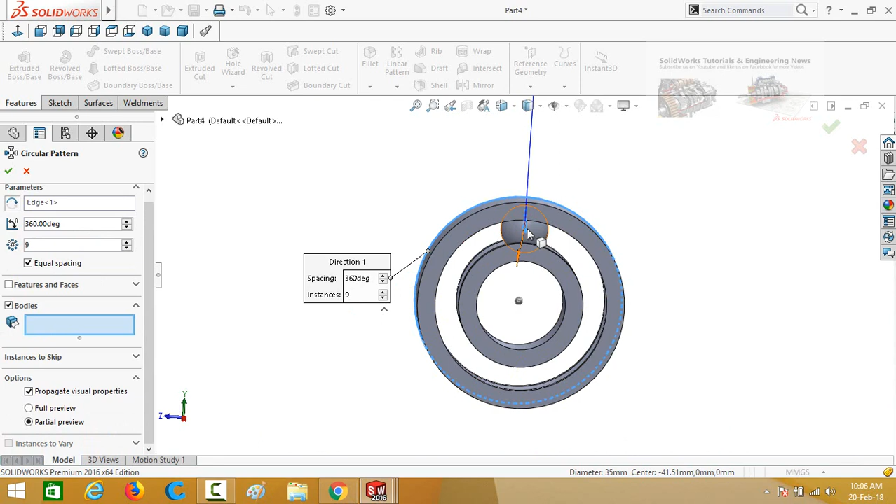Only merging feature may be patterned. So for that, scroll down and then click on this box bodies, then select this ball and press OK button. So bearing is ready. Change the appearance of bearing.

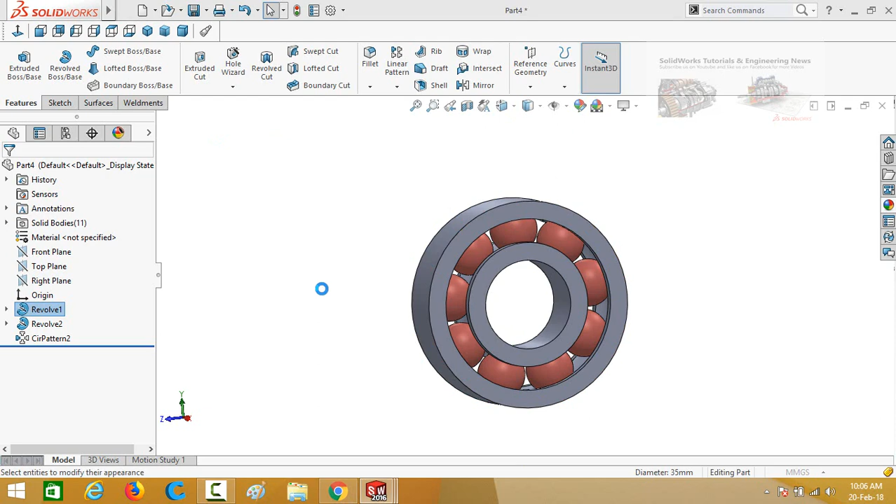Press OK button. Now click on this outer face and then select revolve. Change its color to. Press OK button. Now save this bearing.

The bearing number is 6202. Save it.

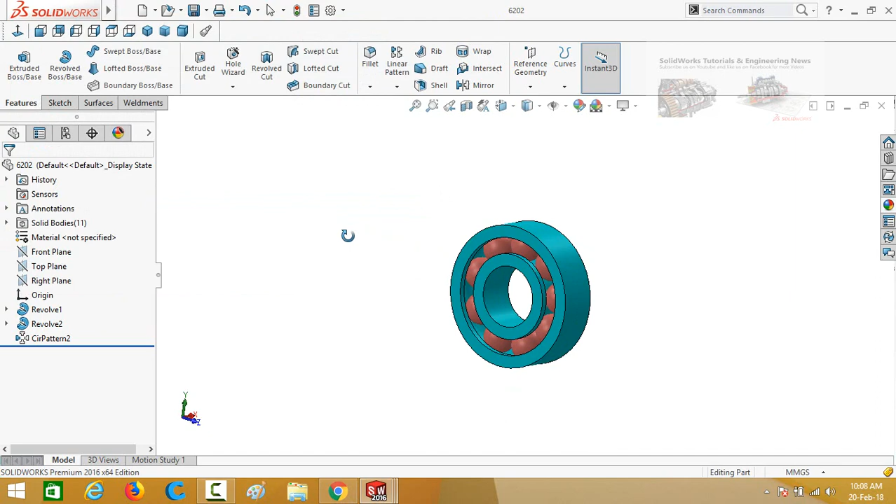Now we have to design the outer casing of this motor. So for that, again start from new part and then sketch on front plane and draw a center line from origin. Now draw another line, start it from here.

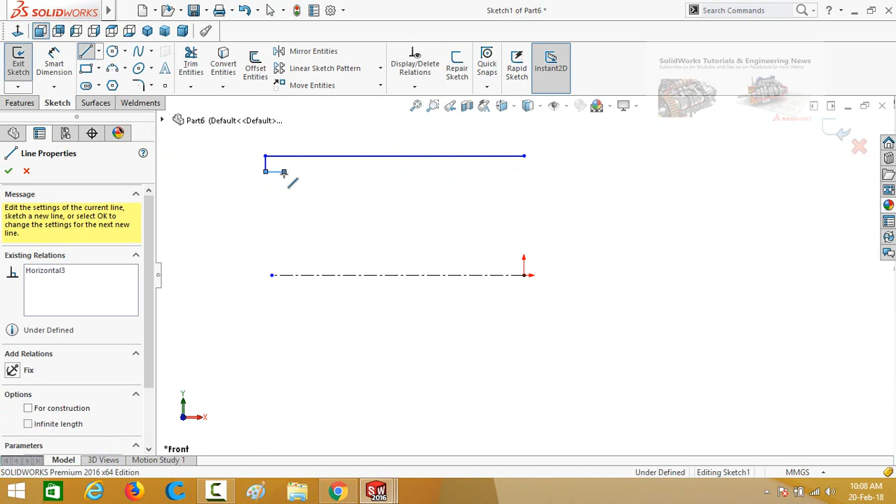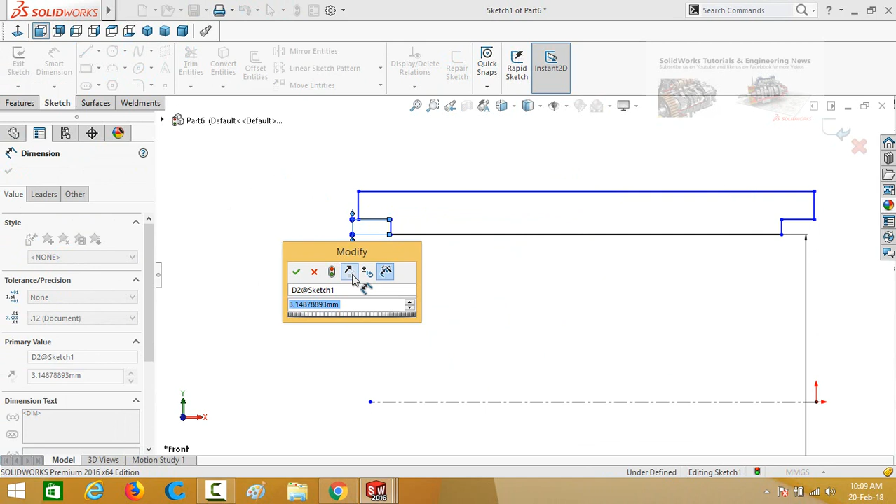Press escape button and then select both of these lines, make their relation equal. Now define the dimensions. This diameter is 70 millimeter. This height is 3 millimeter and this height is 5 millimeter.

This length is also 5 millimeter and this length is 60 millimeter. Press escape button, select this origin and this point, make the relation vertical.

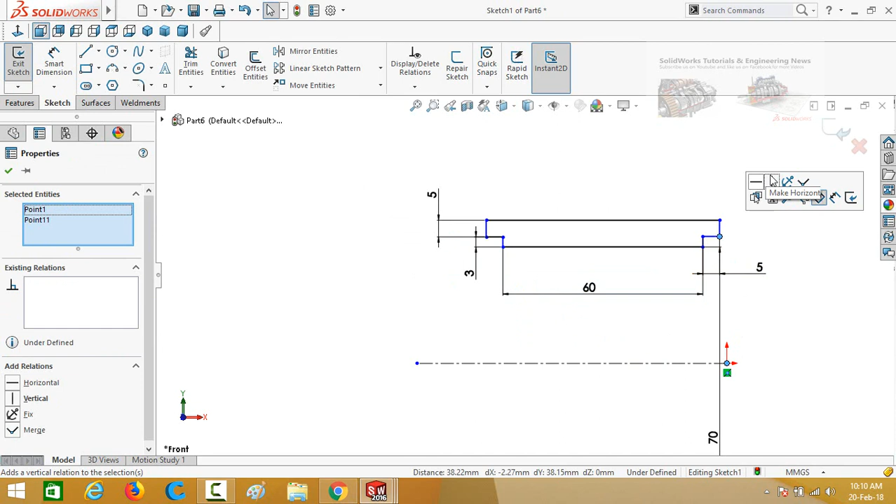Select both of these lines and make their relation collinear. Now our sketch is fully defined, so we can apply a revolved boss base feature on it. Press OK button.

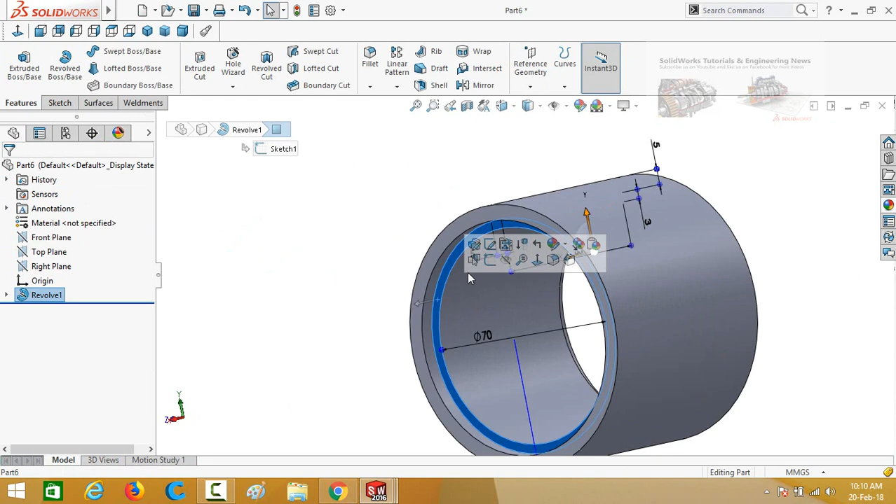Click on this face and then sketch on it. Make normal to by pressing Ctrl+8 key from your keyboard. Draw a line and start it from this quadrant. Now draw a 3-point arc.

Press escape button. Select this point and then this point. Make their relation coincident. Now select this arc and this circle, make their relation concentric.

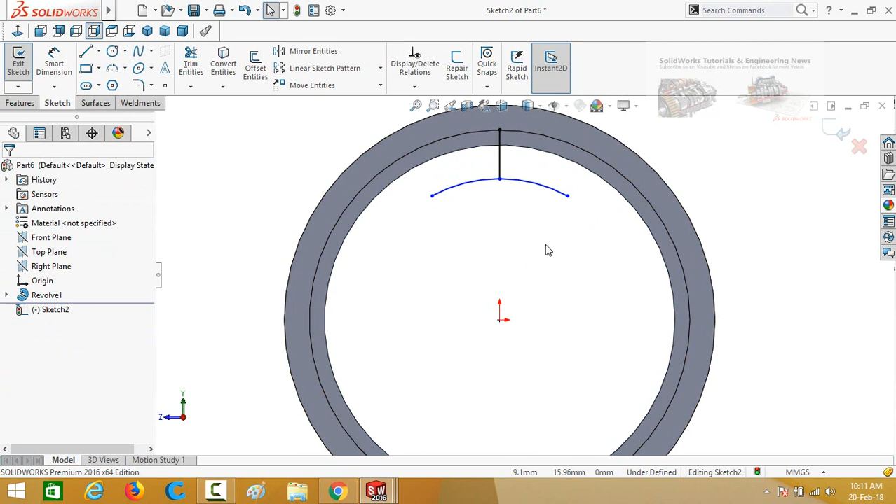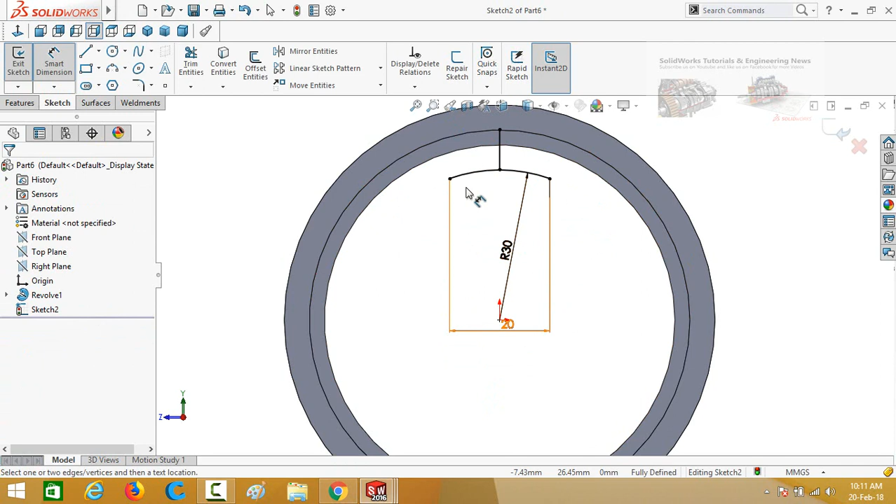Now define the radius of this arc, which is 30 millimeter. Now define this length and it is 20 millimeter. Our sketch is fully defined. So go to features tab and then apply a extruded boss base feature.

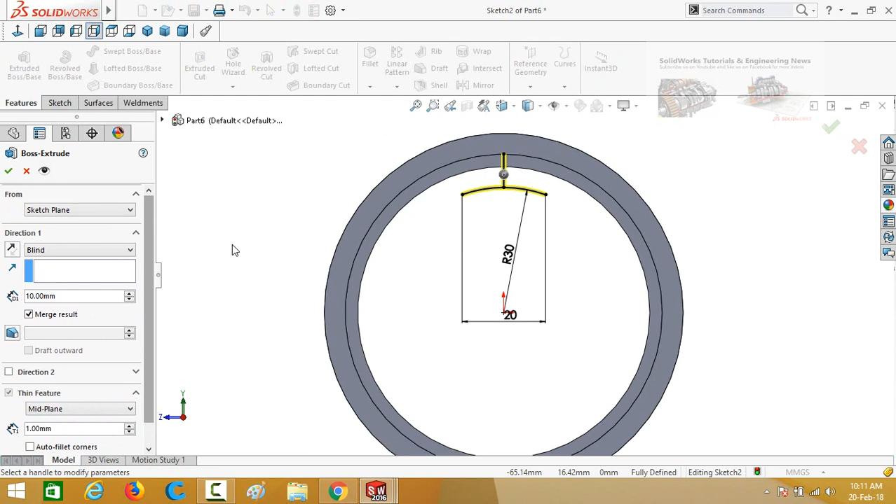From here, thin features, drop down these options and select mid plane and type the thickness, it is 1 millimeter. Now double click on this face and press OK button.

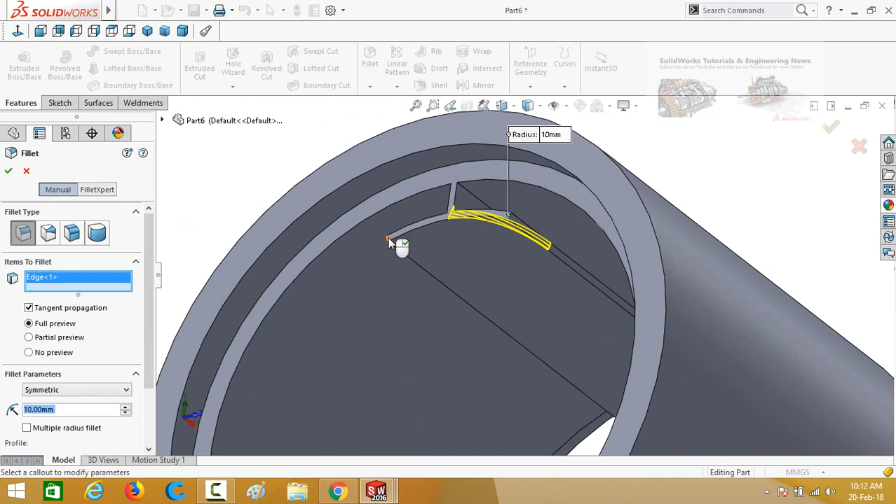From here select fillet command. Now select this corner, one by one select all these corners. Fillet radius is 10 millimeter, so press OK button.

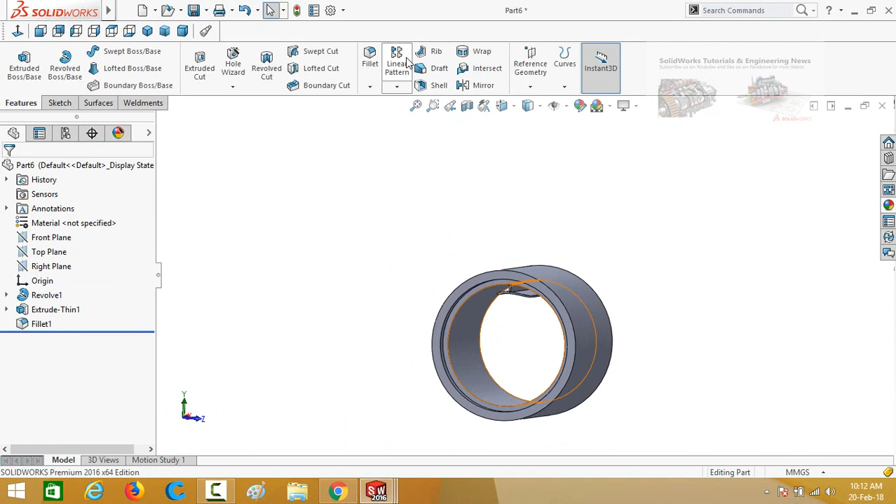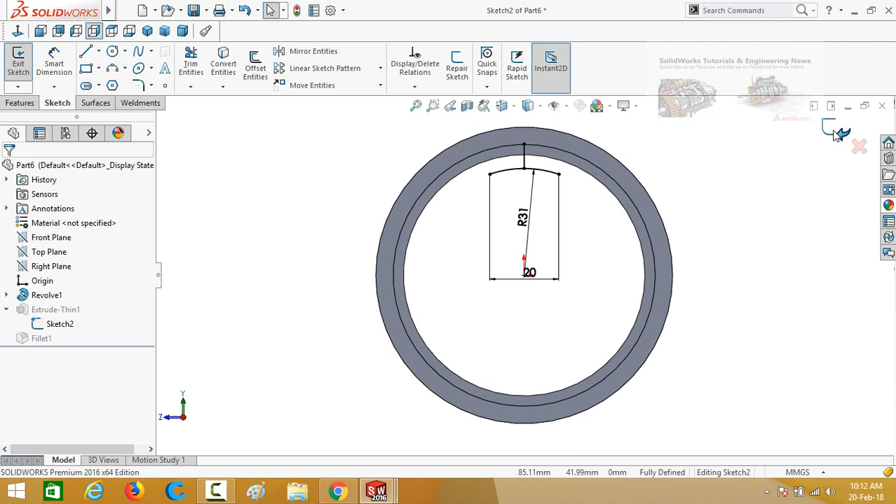Drop down this option and then select this sketch and edit it. Press Ctrl plus 8 key to normal to. Change this radius. Instead of 30, type here 31 millimeter. Now press this button to save and exit from sketch.

Click on this button below the linear pattern command and then select circular pattern. Drop down these options. Select extrude thin 1 and fillet 1. Now click on this box and select the circular edge.

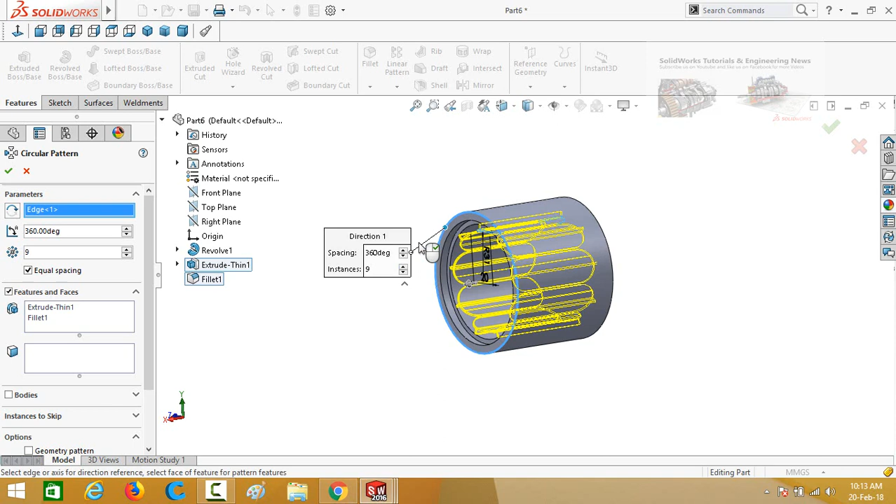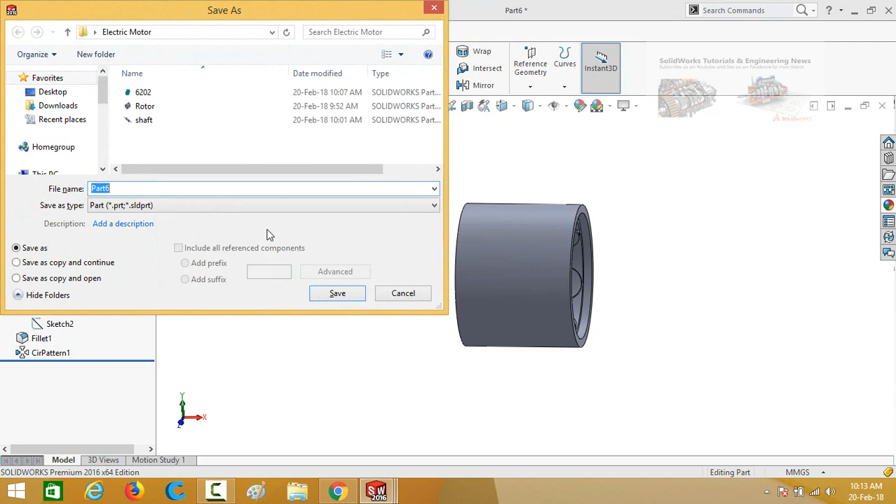So these are the number of poles for our motor, and the quantity is 9. Press OK button to save. Now save this part as outer casing.

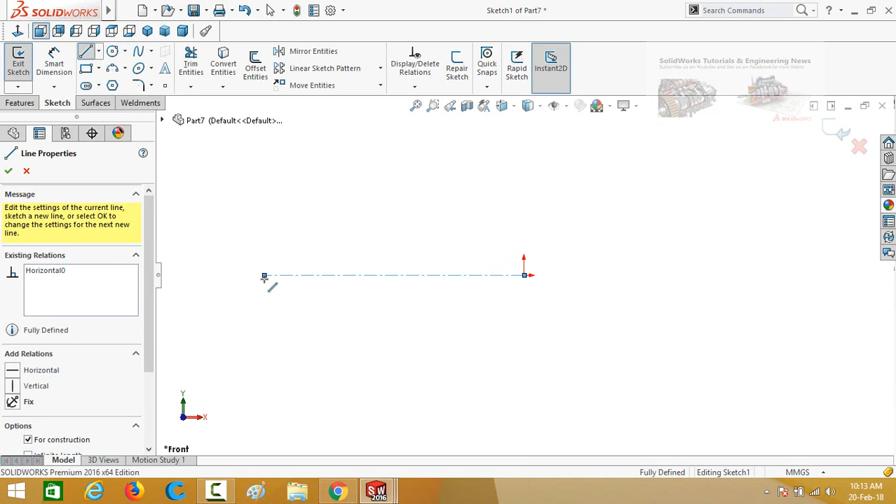Now we have to draw the side covers of motor. So for that, start from a new part and then sketch on front plane. Draw a center line started from origin. Now draw another line like this.

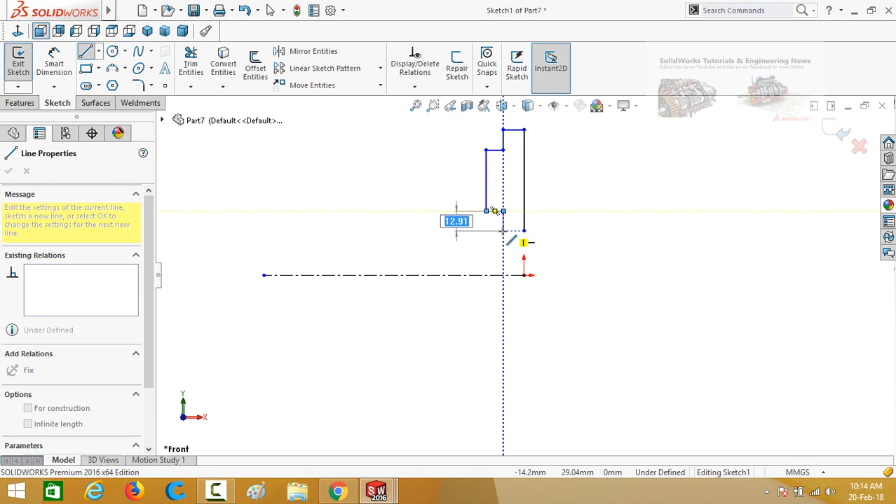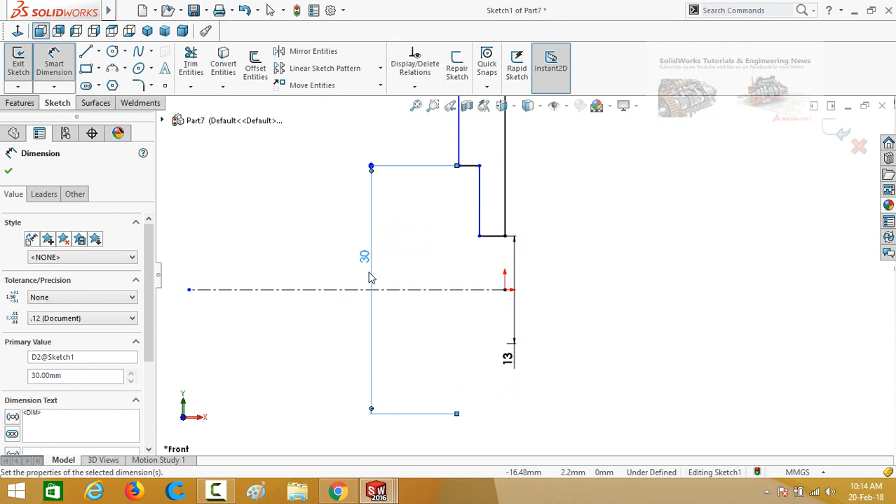Now define the diameters. This bore or diameter is 13 millimeter. This diameter is 30 millimeter. This is the bearing size. So for the diameter of this seat, we have to check the outer casing.

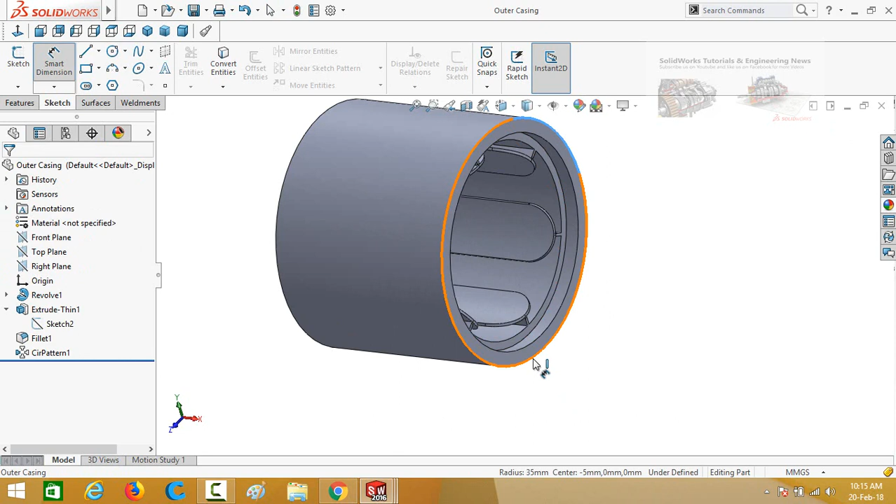Click on sketch and then select smart dimensions. Now select reference dimension and then check this diameter. So if the radius is 35, it means the diameter is 70 millimeter, and this diameter is 86 millimeter.

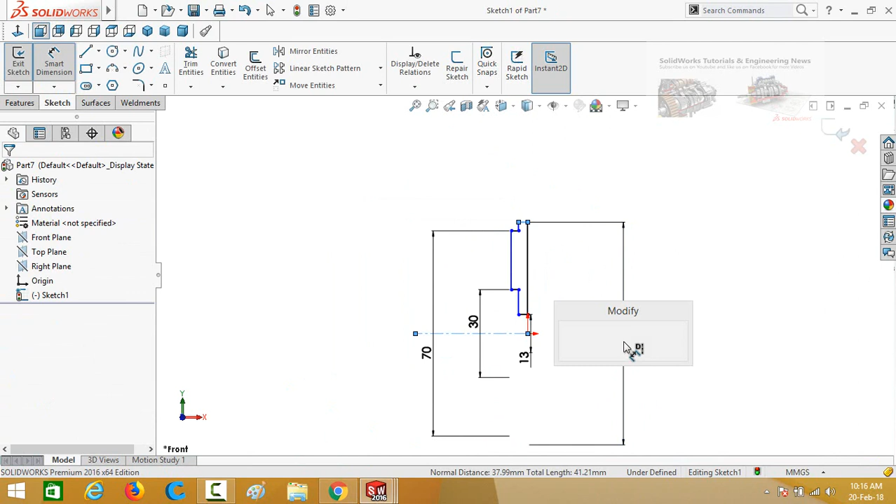And this diameter is 86 millimeter. This length is 3 millimeter and this length is 10 millimeter.

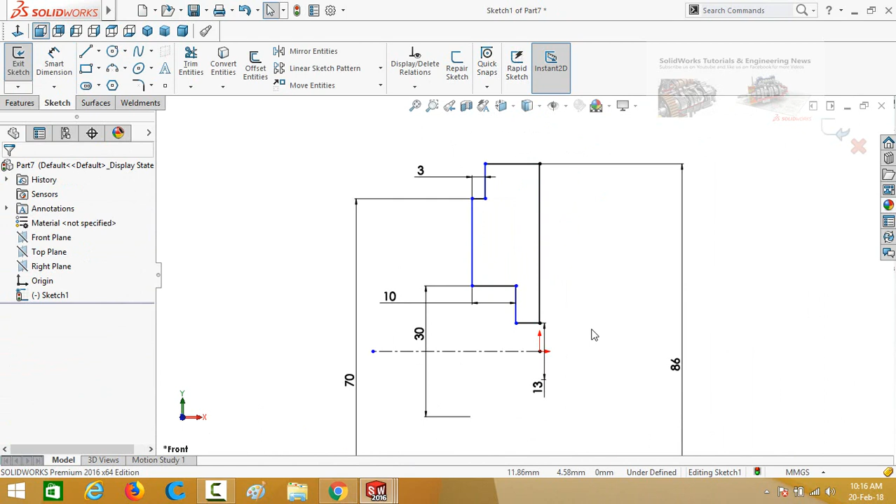Now define this length and it is 2 millimeter. So our sketch is now fully defined. Go to Features tab and apply revolved boss base command. Press OK button to apply this command.

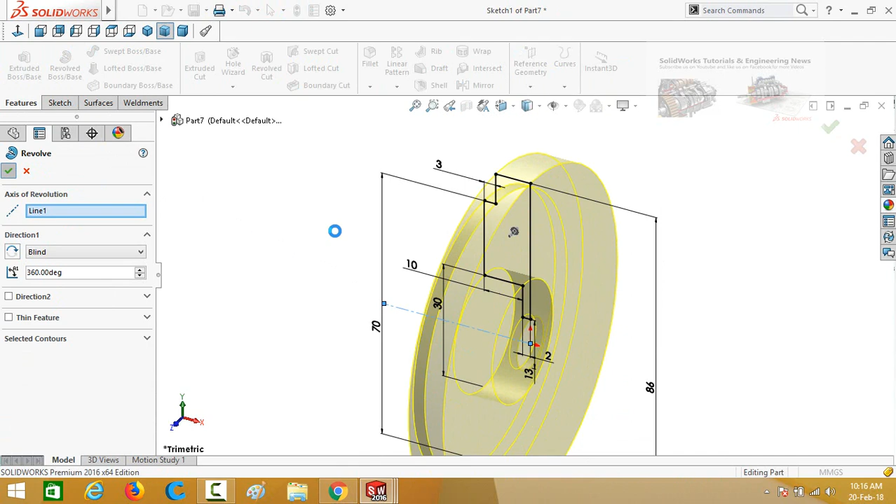Now click on this face and then sketch on it. Make normal to and draw 2 circles. Start them from origin. Now define them. Distance from this circle to this circle

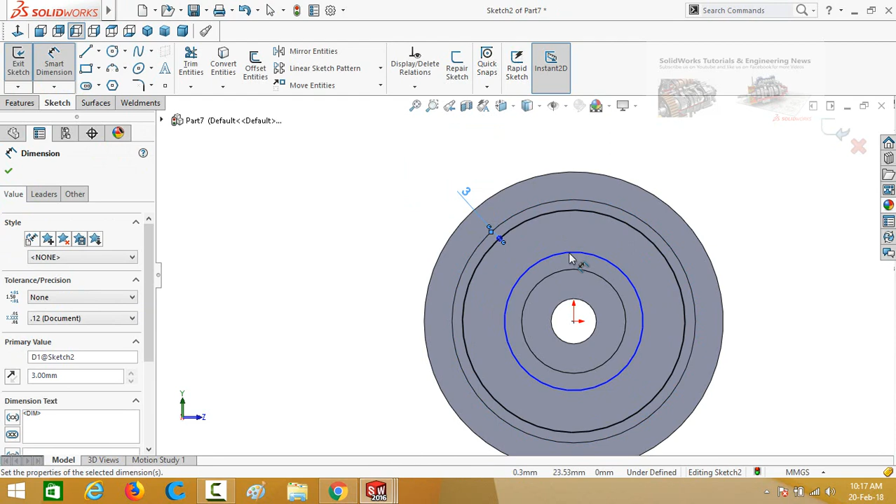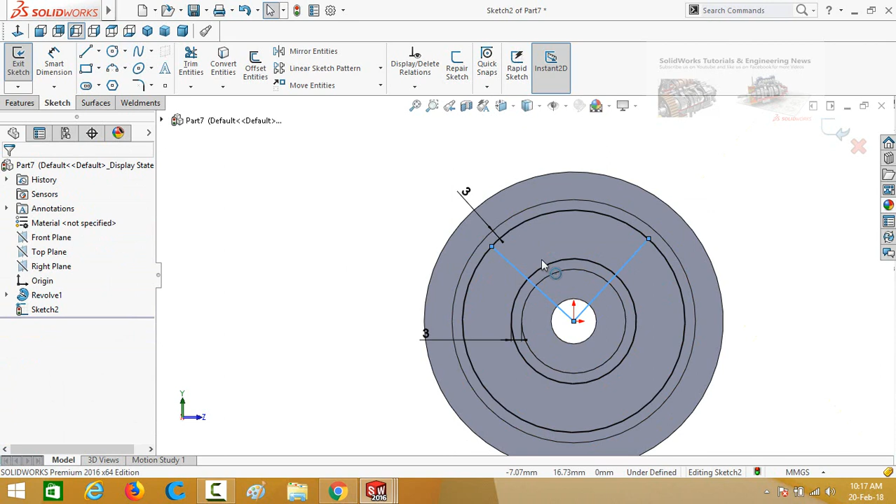is 3 millimeter. This distance is also 3 millimeter. Now select line and start it from origin. Another line started from origin. Select both of these lines, make their relation equal, and then select both of these points, make their relation horizontal.

Now define the distance from this point.